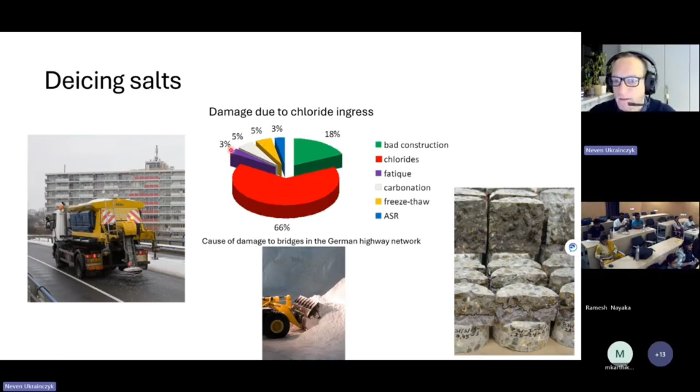So the combination of carbonation and chlorides - my master's thesis was actually to do machine learning on all this data, to do neural networks on all this data collected during the maintenance works.

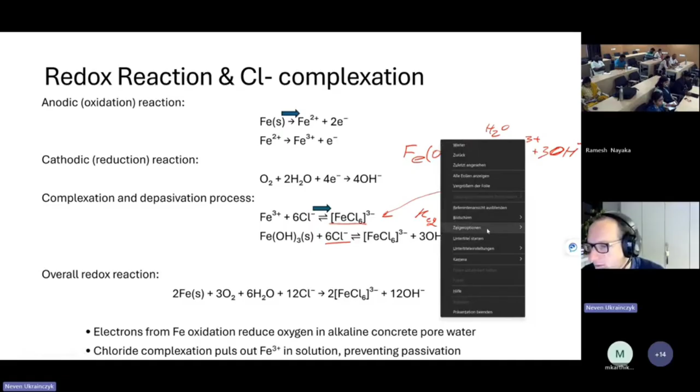And because we have this now, the iron is pulled out by this reaction, because the iron is taken to form the iron complex. We have the equilibrium constant here for the complexation, so this takes some iron away. In equilibrium you have less iron here, and because you have less iron here, that means you have to dissolve more iron hydroxide, increasing the OH. So you are making the iron hydroxide more soluble. Either by lowering the pH or increasing the chloride content - that means lowering the iron content - you are increasing the solubility of iron hydroxide.

This is the same principle I'm trying to teach you, and you can see it's very important. This is what explains why the chlorides accelerate and depassivate the corrosion of steel - basically because they are making the iron hydroxide more soluble.

But of course, in corrosion we also have the cathodic reduction reaction. So the diffusion of oxygen is also important, because this governs the rate of the total corrosion rate. The overall redox, reduction and oxidation reaction needs chloride and also oxygen. So chlorides are important for diffusion because they explain the depassivation, the initiation phase, but when you enter the propagation phase, both the chloride diffusion and oxygen are important in determining the rate of the corrosion reaction.

So here is the picture of the reinforcement - the rebar reinforcement bars, steel bars. Here we can see the surface concentration, and how the chlorides diffuse inside the concrete, reaching some critical threshold.

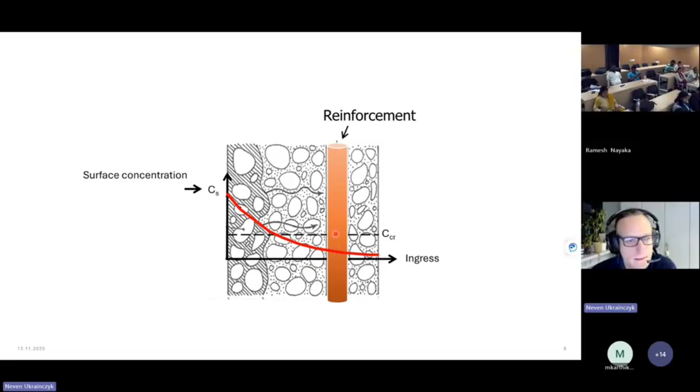This is the critical threshold when the steel starts to become depassivated, and now you know that this actually also depends on the pH. So this critical threshold is a function of pH, and you know why - of pH and of chlorides. So it's not only - in standards we have the critical threshold for chlorides, but this is actually also pH dependent, and you know why now.

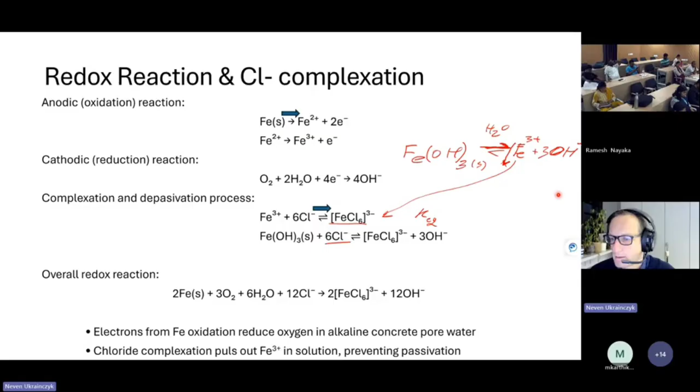So this is typically 0.4%, per mass of cement.

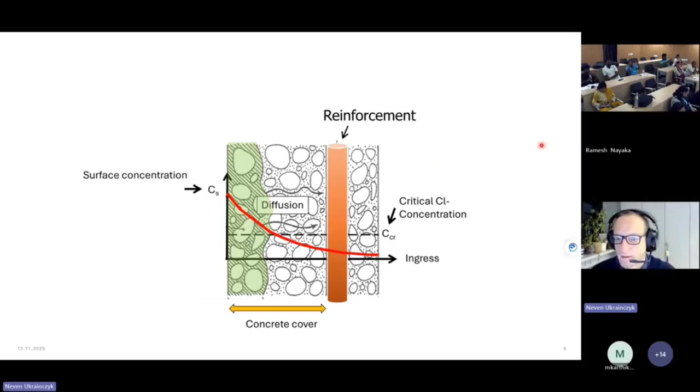This is the concrete cover depth, so the thicker the concrete cover depth, the better for durability. This is the most important design parameter, and you should make this cover depth as thick as possible.

If you put here, this is the RCM test, when you spray it after diffusion, when you spray it with silver nitrate spray, you can see the silver chloride in this silver color. So you can exactly see the penetration depth, how the chlorides come in, and you can see here some ITZ effect and aggregate effects.

And this becomes very important, for example, if you have low water cement ratios and also slag, because then the microstructure is very dense, and then the ITZ, the porous zones, start to become the critical path that the chlorides follow.

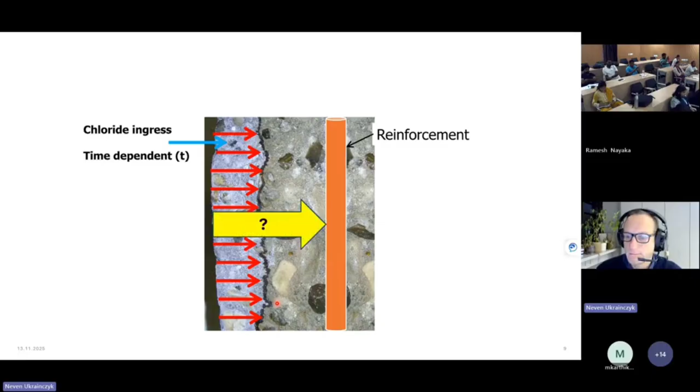So how to engineering model, how to predict this diffusion? It's the FIB Model Code 2020. There is also an update bulletin. I was also involved here, but more for the acid attacks. You can find this bulletin here, and yeah, it's a very nice guideline. It's published, I think, last year.

This is from the original model code. So basically it's just a diffusion of modified second Fick's law. We have here the apparent diffusion coefficient.

Why is it apparent? Because we have the effect of it includes all the parameters, because it's a very simplified model by diffusion. We don't have only diffusion, we also have a reaction, and then also convection, or many things happening. But if you simplify it only as a diffusion, then this parameter is apparent. The most important part is the reaction, the binding of chlorides, and this is why this is apparent.

We have the error function here, and this apparent diffusion coefficient is also time dependent, because the concrete is hardening. You have the pozzolans which are slowly reacting, so they are improving the microstructure. So this is also time dependent, not only because of binding, it's mostly because of the continuous hardening of the concrete, but I would also argue it's because of other effects, like binding effects and pH effects on binding.

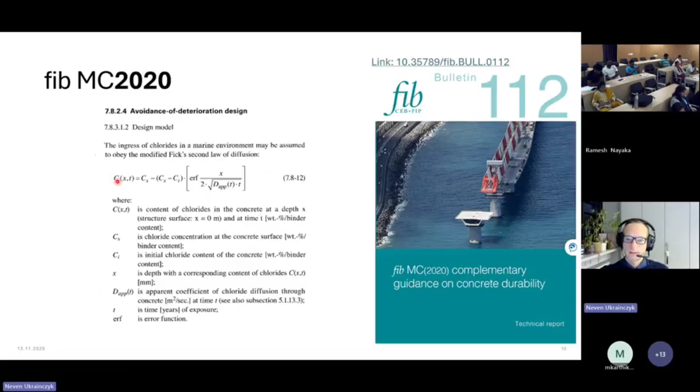So basically, we consider here the total chlorides, meaning the free and the bound chloride. So the total is free plus bound. If this is a pore, we have the chlorides that are bound to the solid, and we have the free in the bulk pore solution. So this would be the bound, and these are the free chlorides. And if you do the mass balance, yeah, the total is kilogram chlorides per cubic meter of concrete, and if we have the free chlorides, also kilogram chloride per cubic meter of pore solution.

We can derive, this is the second Fick's law. It's basically saying that the flux that comes in is equal to the flux that goes out. That's why we have this, this is the flux, and this is the change of the flux in this direction. So what comes in must go out, because there is no reaction.

If you would have a reaction, you just have to add it. But if it's in steady state, yeah, this is the steady state, what comes in must go out. So if there is no accumulation, this is zero. Then you have this Laplace equation, which is basically the second derivative of the concentration.

I will explain this later. I'm just explaining the diffusion equation, how you derive it. So basically you have the concentration gradient. If you take the second derivative, which basically means the change of flux.

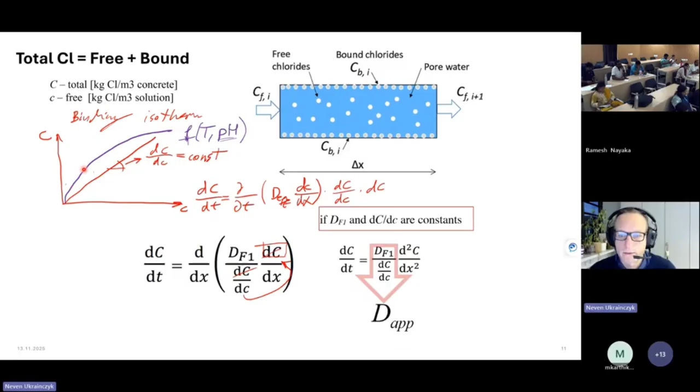The time dependent diffusion coefficient in the Eurocode or the FIB model code 2020 is modeled using the migration coefficient from the RCM, rapid chloride migration test. This rapid chloride migration is not really the real diffusion coefficient, it correlates but it's not the same, but this is the approach because you need rapid measurements and rapid predictions.

We cannot wait. Of course you can take the chloride profile after it's in service, but you can only do that when performing maintenance. If you design new concrete for bridges, you have to predict in advance, so you need rapid measurements. Measurements are typically made after 28 days, but nowadays they're changing this to 56 days or even longer, because of more pozzolans inside which react slowly, so we need a better reference with longer hydration time.

Here is the aging factor, typically 0.3, and this shows how the apparent diffusion coefficient changes with time. This makes the diffusion coefficient time dependent, and you can see this influence of time. A typical value is 10 to the power of minus 12 meter squared per second.

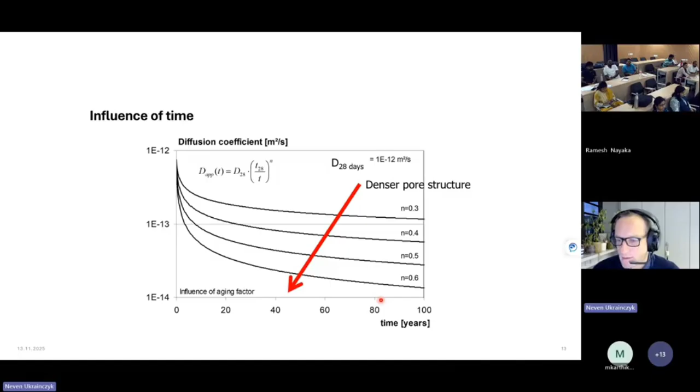That's because the pore structure gets more dense due to late pozzolanic reactions. So there are aging factors influenced by the type of cement. CEM1 would have an n of 0.26, very fast reacting, with no big change between 28 days and the final value. But if you use fly ash, you have a much bigger aging factor coefficient, around 0.7.

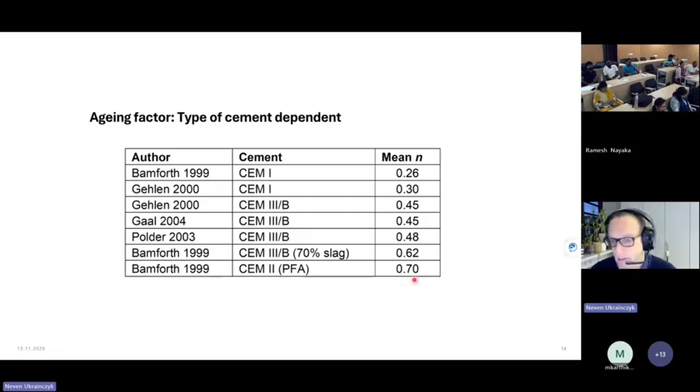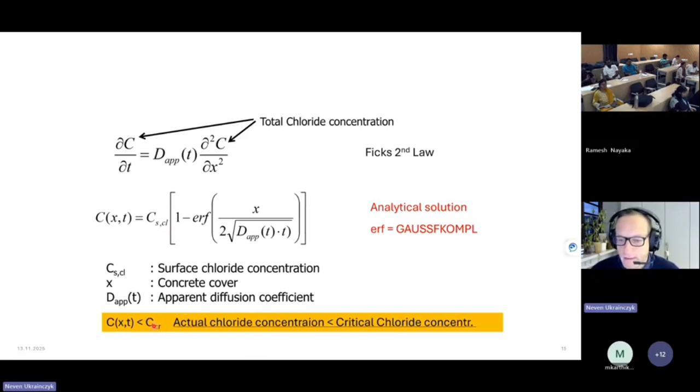Now this is Fick's second law. You can implement this in Python, Excel, wherever you want. We want to predict when the cover depth at the steel level reaches the critical chloride content. When it reaches that critical chloride content, we need to do maintenance: remove the old contaminated cover depth with chlorides and apply new repair mortar.

Here's an example we will solve later. Let's say the surface concentration, the boundary condition, is 3% of the cement mass. This can also change with time, and there are models that account for that, but in this simple model let's fix it at 3%.

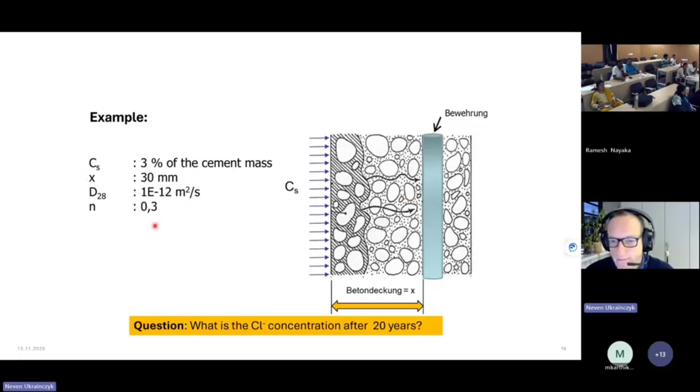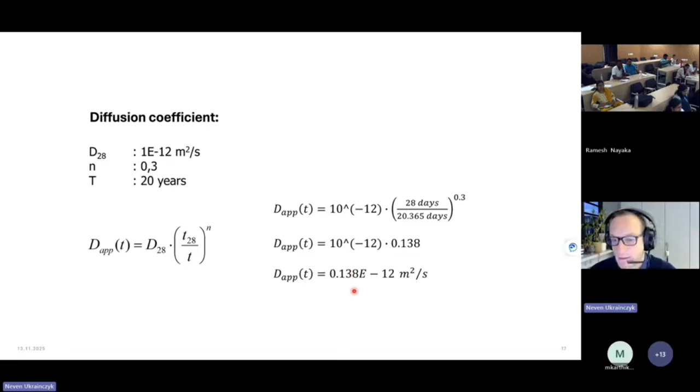We have this diffusion coefficient and the cover depth is 3 centimeters, with an n coefficient of 0.3. Plugging in these values, you can see how the apparent diffusion coefficient is reducing. After 20 years, we go from 10 to the power of minus 12 to 0.13 times 10 to the power of minus 12, almost an order of magnitude lower, which is very important for prediction.

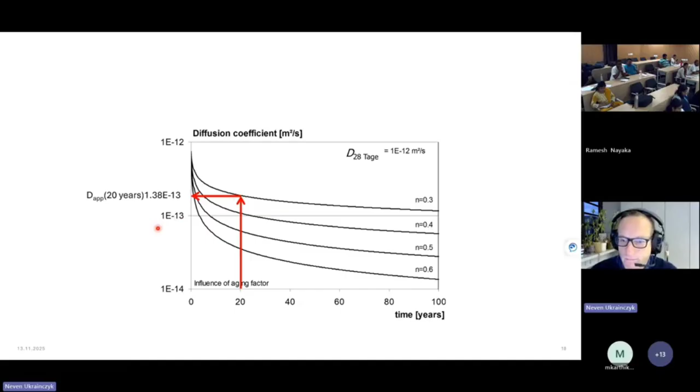So after 20 years, we have an order of magnitude reduction in the diffusion coefficient. This is the critical parameter that basically determines the service life.

If we plug in the values, we get that the predicted chloride content at the depth of the steel bar after 20 years is 0.16%, while the critical threshold amount is 0.4% per mass of cement. Since 0.16 is less than 0.4, we are good — this structure will last at least 20 years.

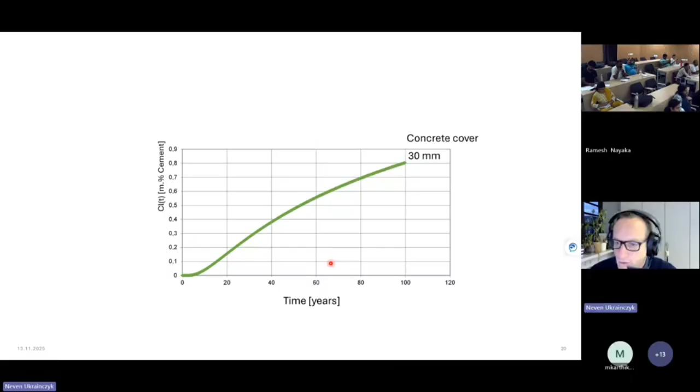Now we can predict at 30 millimeters how this develops with time. At 20 years we had 0.16, but now we can plot at what time we reach the critical chloride concentration of 0.4 mass percent of cement, and we see that this structure will actually last for 40 years. After 40 years, but maybe even before, we should do some maintenance and replace the concrete cover.

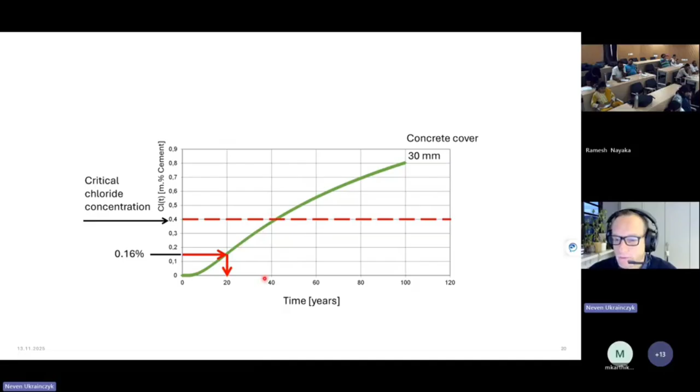But it's a statistical problem. Yeah, this is a deterministic model, but the problem is statistical because we have the variation of the concrete cover depth. We also have uncertainties in parameters, and that's actually in the model code. You already have the stochastic, probabilistic approach, so you can have uncertainty about at which year you should make the maintenance, with how much percentage of uncertainty or certainty.

So you can also have different cover depths. This is for design. Of course, if you increase the cover depth, you drastically increase the service life of concrete. Or you should actually make the concrete better, that binds more chlorides and is denser or less porous, more better concrete.

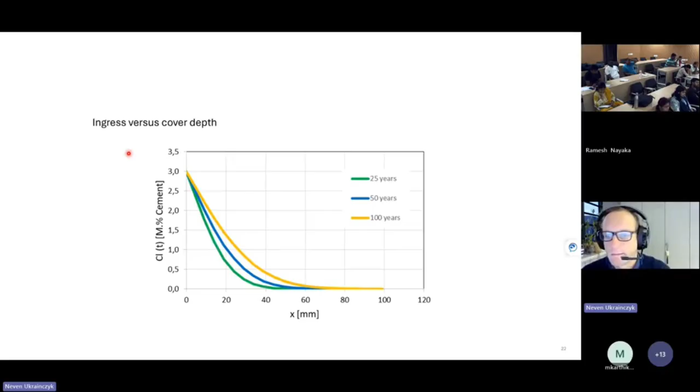So here you can now play with the model. There was the RILEM TC, the old technical committee on chloride ingress modeling. It was to benchmark chloride ingress. Professor Gehlen was chairing this. I was helping here, and I also drafted and wrote the chapter 3 on marine submerged conditions together with the French guy, Anthony Soive. And we basically benchmarked a lot of models.

Here are the models, different models. We use the FIB as a reference. Those are all the big guys in this field using models, and then we were predicting. I also had here one model, the reaction diffusion model, where I explicitly modeled the chloride ingress by the nonlinear isotherm, Freundlich and Langmuir. So there were analytical models and numerical models, and some quite advanced reactive transport models, like STADIUM for example, and more advanced analytical models.

And there is one case study, very well defined, from Norway I think, or Sweden, I'm not sure, I think it was Norway. They did a very well documented case study, and we used that case study to benchmark the models.

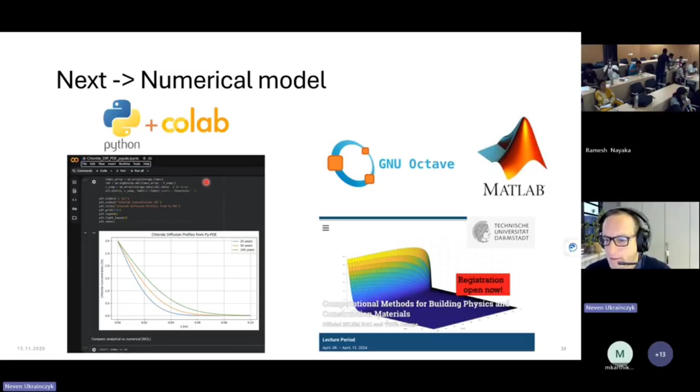So you will see some examples later in the Python. I think this part I will explain later. Yeah, this is a reaction diffusion model.

I implemented this in MATLAB to solve this partial differential equation with reaction and diffusion. This was an example of one model. There were many more advanced models with reactive transport, even using moisture, convection - quite advanced models were also inside.

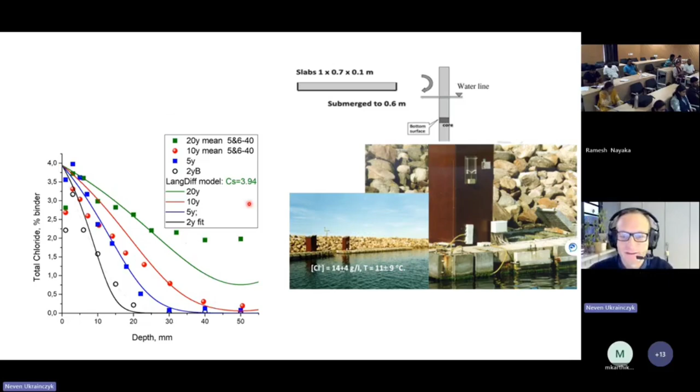So these are the measurement points, and those are the predictions by the model. The dispersion of the model predictions was huge - some over-predicting, some under-predicting. There was a huge dispersion between the predictions.

I didn't show it here, but you can see it in this book. I think I even have it on ResearchGate, so if you want I can share it with you.

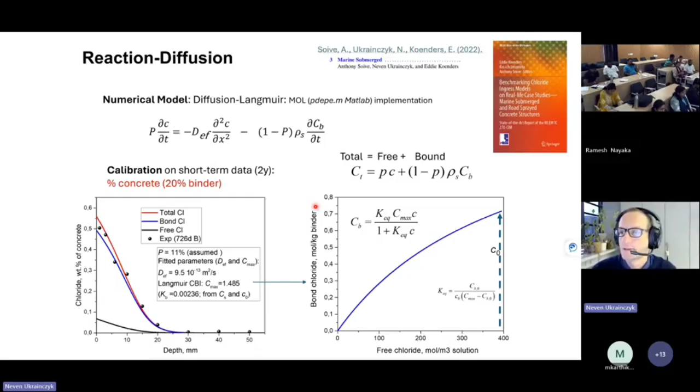So that was the old TC. Now we have the new TC meeting. This is chaired by Pranoy - probably you know Pranoy, at University of Miami, an Indian guy. I don't know exactly where he's from, which part of India - Prannoy Suraneni. And he's chairing this with William Wilson.

And we just published a paper in Materials and Structures. It's open access, so you can see it. It basically reviews all the methods you can use to predict the diffusion coefficient, and it's also focused on blended cements, so that's very timely and relevant.

It's focused on paste - how to downscale, how to do fast measurements on paste and mortars, so that you don't have to do it on concrete, but you can also compare with concrete, and maybe speed up the measurements through downscaling, because then you can test the blended pozzolans and how they affect the diffusion coefficient. So we focused on blended cement pastes.

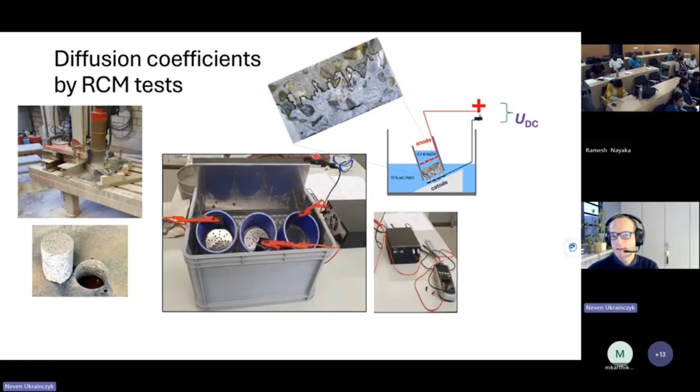That's how the RCM, rapid chloride migration test, looks like in our lab. We are now running a round robin test in this technical committee with 4 different mixtures: ordinary Portland cement, fly ash blended with slag, and LC3 with limestone and clay - 30%, 33% clay, the LC3 mixture.

On those mortars and pastes, we had 1 year of hydration, then exposure for 28 days to a 0.5 molar sodium chloride solution. It's coated in epoxy so that we have one-dimensional diffusion.

Then you can do the grinding for the Volhard titration method, or, as we did, take a cross section and use the microscope, like micro XRF or EDS. We have EDS here in our lab, so we are developing a methodology for using EDS microscopy to get the chloride profiles.

So this is the round robin test we are currently running - you can join if you want. We are comparing different methods with different blended mixtures, measuring both paste and mortar. That's currently ongoing in this technical committee - it's working group 4, and I'm chairing this group.

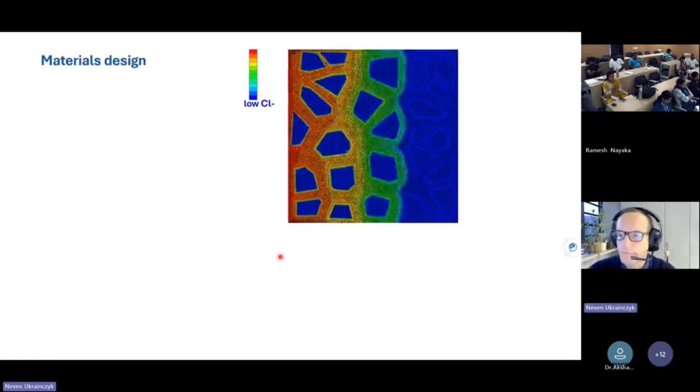In mix design, going into concrete, you can see how ITZs also affect things - they are the more porous regions which affect the penetration.

And there are also coatings you can use, like styrene-butadiene rubber coatings, typically used in the US at least 10 years ago. Nowadays, for environmental reasons, maybe they should be replaced. There are other coatings I reviewed in this paper.

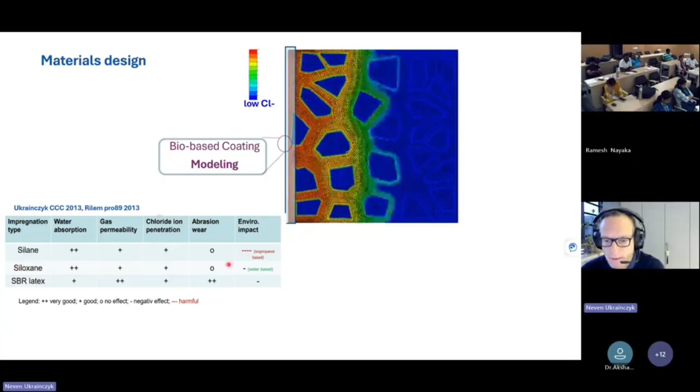Silanes, siloxanes, SBRs - that's experimental work done in the lab, showing pros and cons of each, and environmental impact too. You should use water-based siloxanes, and then see how they lower water absorption, gas permeability, chloride penetration, and also abrasion wear.

This is the multiscale view. If you go into the cement paste, you have the diffusion of chlorides in the cement paste, and the ITZ is also very important.

Here I come back to this UHPC which we are making for the floating farms, where we are using slag blended cements in UHPC, ultra high performance concrete, with steel fibers.

A few weeks ago we were in Spain, at the factory which is producing these UHPCs. We are making the first design of this kind of structure.

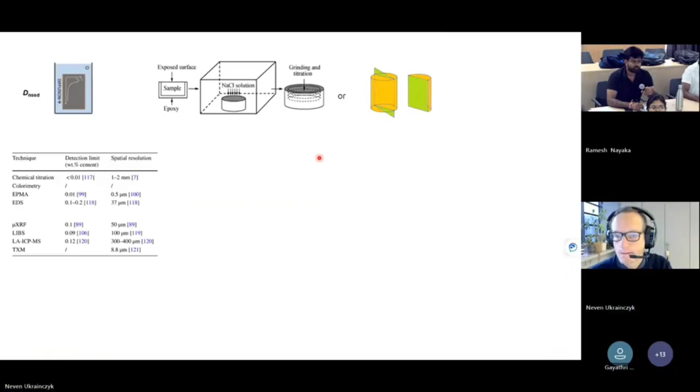For RCM, I would recommend you better do the full RCM test, rapid chloride migration test, the NT Build norm. I think I have it here. Yeah, this is the worst method you can do, the rapid penetration - I know it's the fastest, but it's also the most uncertain. I removed the non-steady... I didn't put but this is the NT Build, I didn't put the norms, I forgot the number.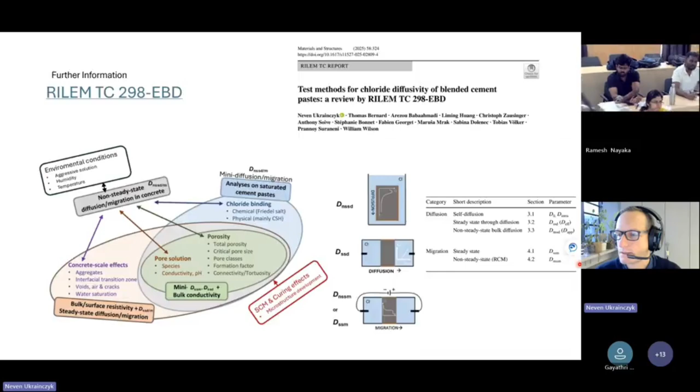At least for RCM, I would recommend you do the RCM test. You can also check this in the paper we reviewed - we also discuss... where was it... this, we also had some discussion on the methods.

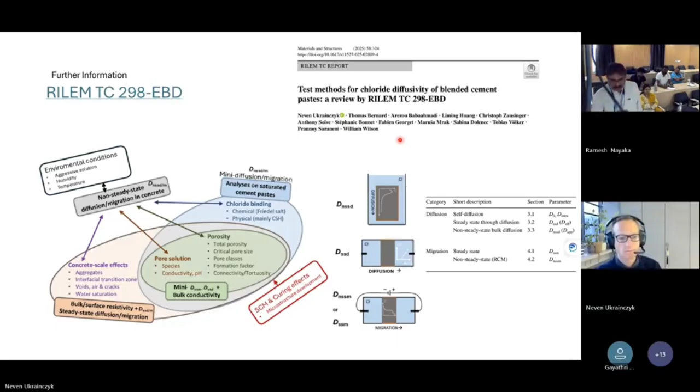But for geopolymers, actually, because they are interesting for acid resistance, I will talk about that. You will see some geopolymers here for the acid attack.

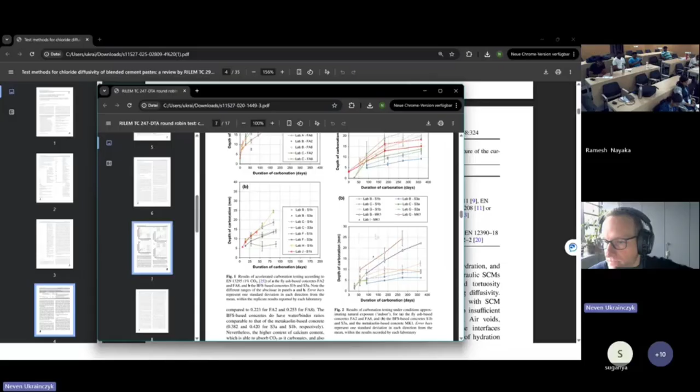RILEM TC 247-DTA, it's on carbonation and chloride penetration testing of alkali activated concrete. I shared the link with you in the chat. So very nice, you can see here the effects of how to measure it on alkali activated materials.

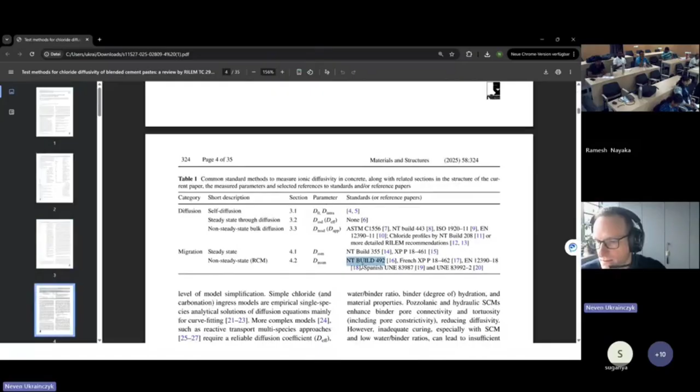And here I also - they are all open access papers. This is the one, maybe I can also share this link. And here you can see the methods, so this is the NT Build, it's also freely available, that's the Norway standard, it's also an EU standard. So this is what I would suggest you do, the RCM test, rapid chloride migration.

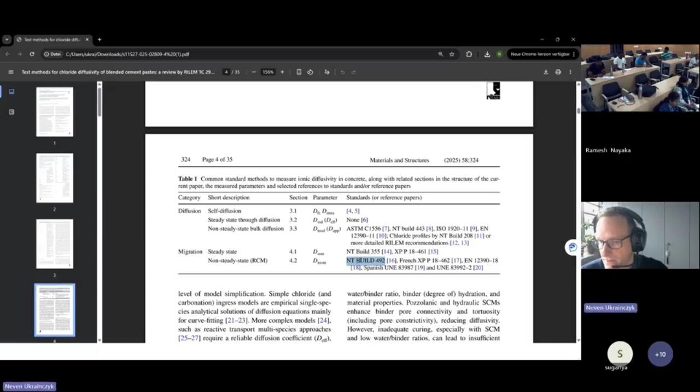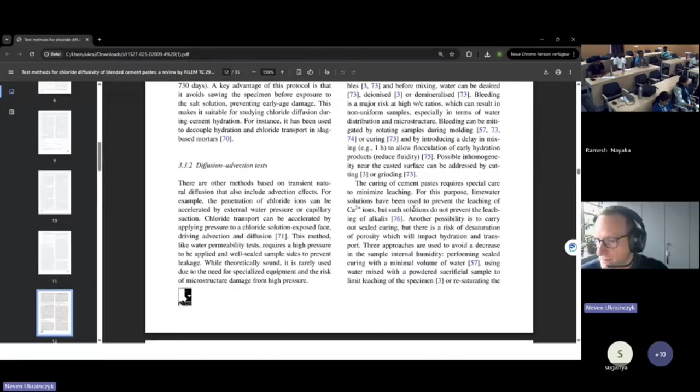And actually here you can see what we wrote. We didn't even include the RCPT test because there are some other tests, also interesting tests with penetration, but where was this text on migration? Yeah, migration tests, and then, I think you are referring to this one - it's the French, or the Canadians use this test also, I know a lot.

The coulomb test - you are basically measuring just the charge passed, as an index of chloride resistance, but cannot directly determine the diffusion coefficient due to involvement of all ions. However, using almost the same setup, a non-steady-state diffusion coefficient can be theoretically calculated, as outlined in NT Build. I think it's not so difficult to use the same, almost similar setup and switch to NT Build. I would recommend you use the NT Build method.

Of course, there are differences, but I think the setup is similar. I think it will be easy for you to follow and to build on the same setup. So let's continue with acid.

And now we go also to geopolymers. If you are interested in geopolymers, we do a lot of research, 11 years already researching geopolymers with companies, trying to bring this to market, but also a lot of fundamental research. Especially I'm focused on acid resistance.

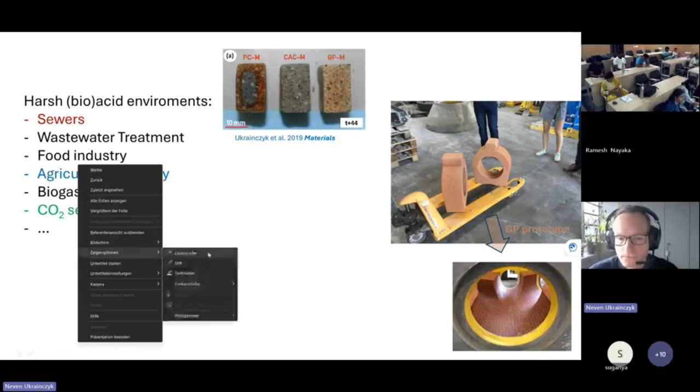But there is also wastewater treatment plants, food industry with a lot of organic acids, agricultural industry, biogas nowadays because of the energy crisis. CO2 sequestration also - that's the paper I showed you where they want pumping of CO2 into abandoned oil wells, but I think this is not so relevant nowadays. It was interesting maybe 10 years ago.

So we have different exposure classes. XA1 - I don't know if you also follow this, I think this is European, similar in US, and probably you have similar things in India. Exposure classes mean the concrete should be designed according to the exposure class. So basically, when you define the concentration of the aggressive species or the pH in the table, then you define the class, and then you know the minimum water cement ratio and the strength and all these durability parameters.

But what I told you in sewers, basically, you need surface protection. This is what I wanted to say here. Basically, in XA2, XA3, and there is a new class, XA4, all the classes require surface protection. So only XA1, only if you have very low chemical attack, you don't have to use it. But in the EU, I think in US the same, you always have to use surface protections.

But the coatings are also not so sustainable, let's say. The company where we were doing this demo with geopolymer pipes - actually in this factory, they had linings, like polyethylene linings in the sewers, but they also had many problems with these linings.

So this is how the UHPC would look like after a year or a year and a half in situ in sewer systems. And you can see the geopolymer may change color, but actually was performing really well.

We also did some research on using copper, since copper has antibacterial properties, but we actually abandoned this idea, although nowadays we see many papers doing this again. But you also have the leaching of copper, so the question is, is it really sustainable?

We also tried with zinc oxide, but I think only geopolymers work well if you design them well, with alkali activated materials. We did pure geopolymers without calcium, but if you add some slag, that would also improve the durability. Because the more calcium you have, the more soluble it becomes, but it's also less porosity.

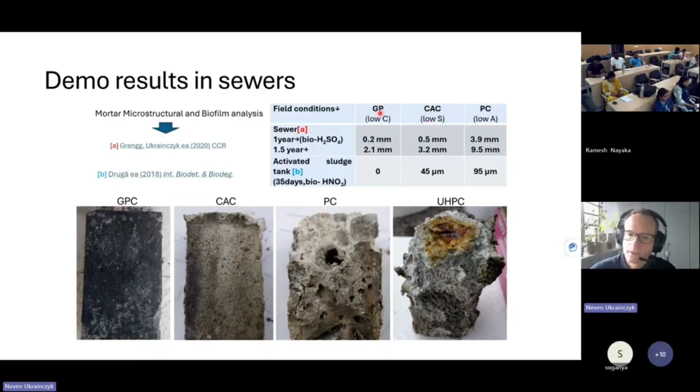which are 3 times more expensive than Portland cements. Yeah, it depends also on the mixture. Geopolymer is more expensive, but it's more durable.

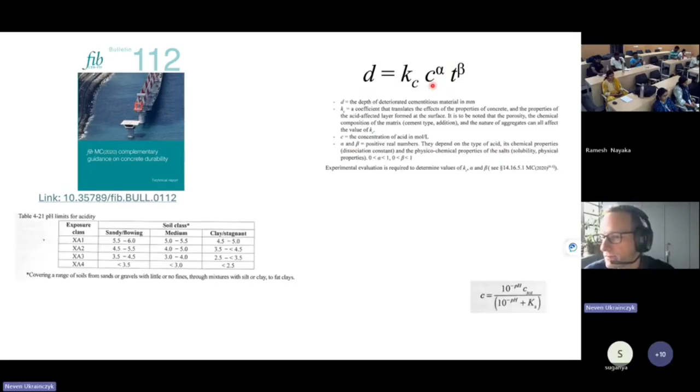the alpha. And alpha actually depends on the type of acid, because you have different types of acid. So if you have a soluble salt acid like nitric acid, then beta is 0.5. But if you have a protective salt acid like sulfuric acid, because it makes

a protective layer, but it also closes the porosity because of the precipitation of gypsum, but it also makes cracks. So then you can change this beta factor. And you can have a strongly dissociating acid, which basically means you have a very high equilibrium constant.

Then you can easily calculate the pH. But if you have a buffering acid like acetic acid, this is the way you can calculate the concentration from the pH, or the pH from the concentration, because this is weak. Weak means that it's weakly dissociated.

It's not weak in that it's not... it's actually even more, it has a buffer effect. Weak means that it's a weak constant, meaning it's weakly dissociated, so the pH is higher, but you have a high amount of buffer that can then provide more protons, more H+. So it's not weak - it can even destroy more concrete than the strong one for the same pH, because of this buffering effect. Weak means only that it's a weakly dissociated acid, like sulfuric acid being strongly dissociated, and acetic acid, so vinegar, being an example of a weak one.

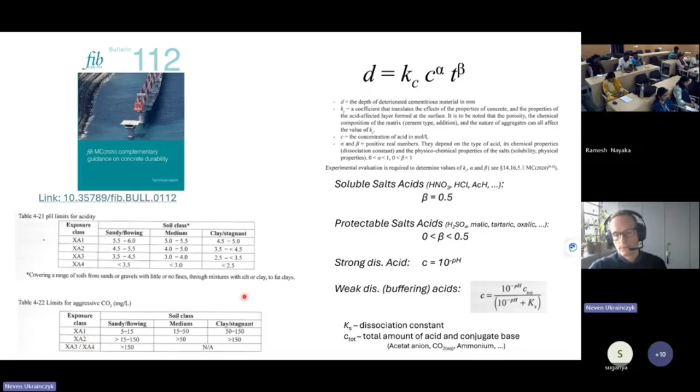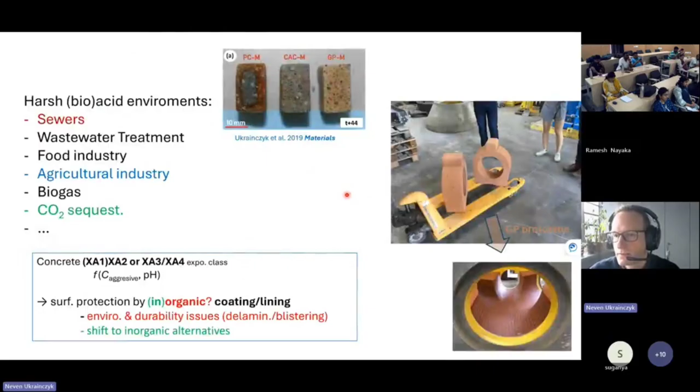It's one of those samples here, but for aluminate cement - actually acetic acid strongly dissolves aluminate cement, which should be acid resistant, but because of these complexation reactions, it dissolves a lot of calcium. And now you know the mechanism.

Again explained by the solubility constants, you are increasing the dissolution of hydration products. Also, by acetic acid, you are complexing the calcium - making a calcium acetate complex, which is again taking calcium from the equilibrium ion activity product, so you need to dissolve even more. This is why calcium aluminate, although it's a very acid resistant material, does not resist acetic acid so much.

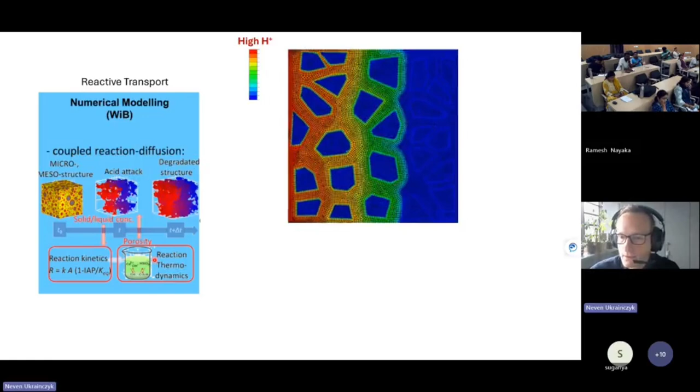So we are also working on reactive transport models to really understand the thermodynamic dissolution - what we saw here, the chemistry behind it - also solubility of geopolymers. This is what I am developing. This is not yet available in the literature, especially not the acid resistant thermodynamic description of geopolymer. And then to link this in a reactive transport model for acid attack, we have fundamental research projects on this.

You can see on cementitious materials thermodynamic modeling, when you are adding acid, you can do this with GEMS already now - I will show you examples. So you can predict how the portlandite here dissolves for acetic acid, and here for sulfuric acid. When you are adding more and more acid, the portlandite dissolves, then the CSH is dissolving, and you are precipitating silica gel, and the pH goes down.

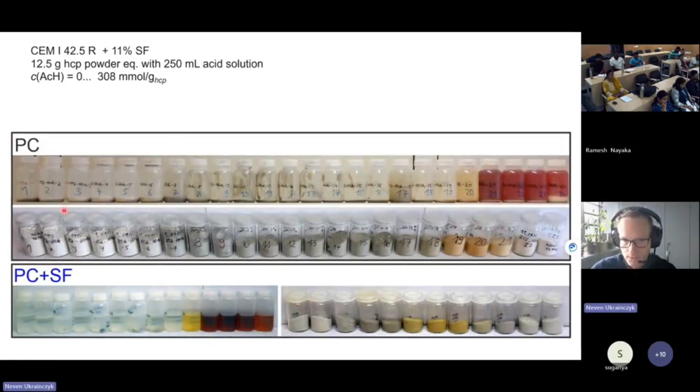The difference is that acetic acid doesn't precipitate any protective salts, but with sulfuric acid we have gypsum precipitation - but this is a high volume of gypsum, so there is some critical volume that then makes cracks because it's expanding, wants to crystallize, and then it's expansive and you get cracks. So it is protective, yes, but it also makes your layer crack, which then again allows new acid to come in. So we did a lot of tests on thermodynamics, many mixtures with different acid concentrations with Portland cement and silica fume.

Also for sulfuric acid, this is acetic acid. With sulfuric acid there was this protective layer, so we could not really get the equilibriums - that's the challenge with sulfuric acid. And you can see the model.

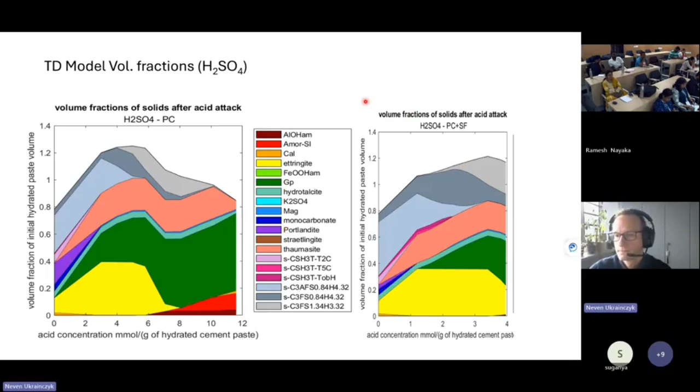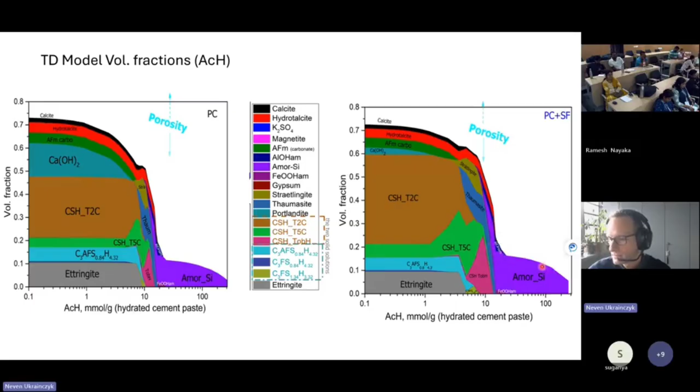This is the volume fractions with acetic acid, with Portlandite, Portland cement and silica fume. Again, less Portlandite. And you can see which phases are forming - you have thaumasite, straetlingite, later it's dissolving. We have alumina gel here precipitating, and amorphous silica gel, also iron gel.

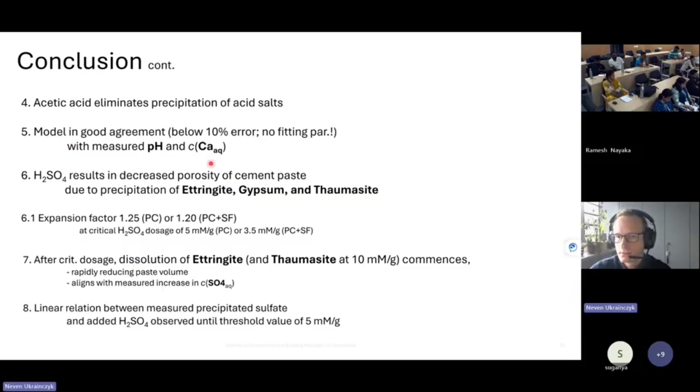Some conclusions - you can read this. There were some interesting conclusions. And now I will go to geopolymers.

So you have aluminosilicates. Here you don't have calcium, basically, and this is what makes it acid resistant. So you have these aluminate tetrahedra and silicate tetrahedra, which you have with aluminosilicates like, for example, clay minerals - they are dissolving. You have potassium activators, hydroxide activators, and silicates, which then polymerize.

So those are the tetrahedra, aluminates and silicates. Silicate is neutral - this is the silicate tetrahedron, and aluminate has one negative charge. And basically you are just linking those tetrahedra. It's called polycondensation, because you are basically releasing water. Those are the oxo bridges in between.

You are releasing water, so it's opposite to cement hydration where you bind water - here actually you are releasing water in a polycondensation reaction, and you are making this three-dimensional polymer. That's why it's called geopolymer, but it's made from silicate, not from organic carbon, but inorganic, from an aluminosilicate polymer network.

If you would polymerize this further and crystallize, you would get zeolites. So they are basically amorphous analogs of zeolites. And you can see this reaction written also chemically - you can see these oxo bridges here.

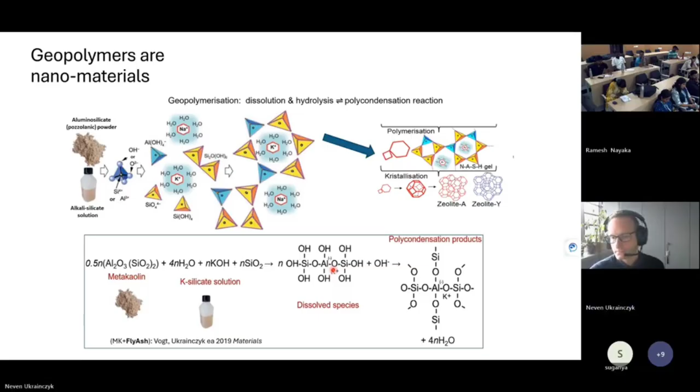And this is important because with acid attack we have leaching of these alkalis, and this is why I'm explaining this - because it's also important for the pH for the reinforcement. If you want to use it, then actually this pH very fast it goes down, by leaching or by acid.

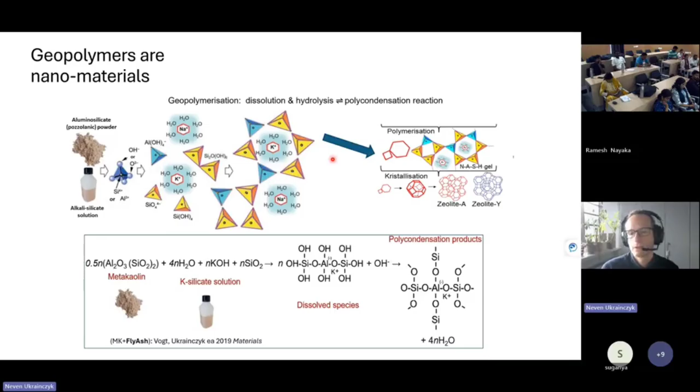So these are the raw materials and characterizations that we use. Basically it's a mixed clay and a very pure clay. This doesn't work so good, the pure clay. This is the Metamax commercial, but this clay is very successful - it has also high iron content, and it has illite inside.

So we compare this with Portland cement, calcium aluminate cements - I will not go into all the details. Of course we are using potassium silicates, not sodium, because potassium is better, although it's a bit more expensive, but it's better because it's better rheology, but also less leaching.

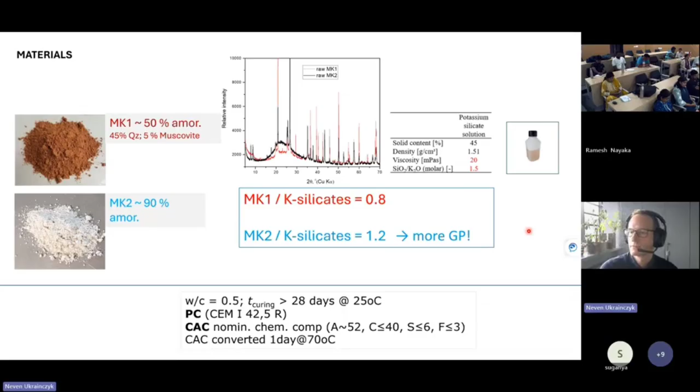Here you can see the viscosity, and the molar ratio of silicate to potassium is 1.5, but now we are using 1.7, because with 1.7 you can transport this. It's not hazardous, it's less alkaline, so you don't need special permission to transport this kind of silicate. That means less alkaline, more silicates. It also works very good, and it's more sustainable.

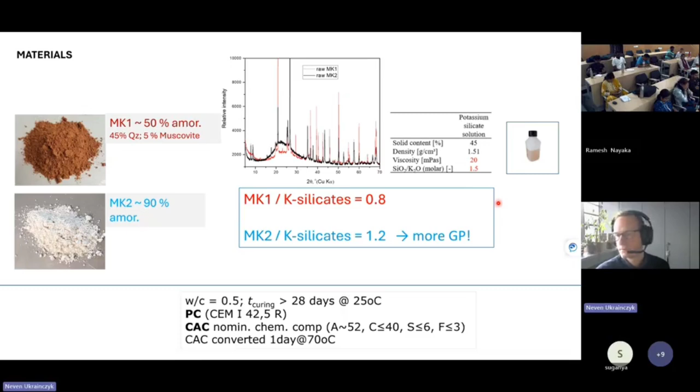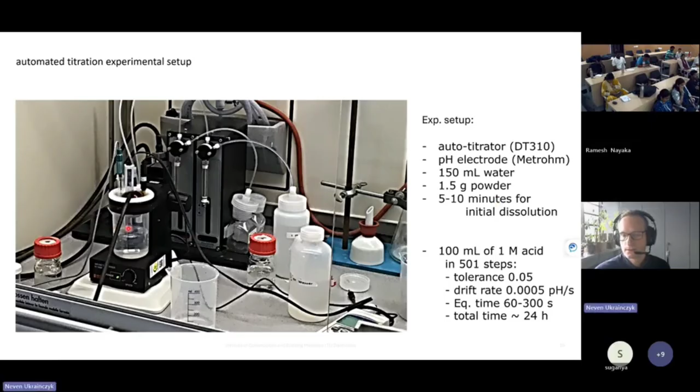Here I wanted to show you can do the pH titration experiments. Basically you are dosing acid, and you can see the neutralization capacity of the binder. This is very important, because for Portland cement it has a very high buffering. So you are adding HCl and reducing the pH. It's in the powder, so this is almost equilibrium powders. You can measure the neutralization capacity of the binder.

This is because of the dissolution of portlandite and CSH, and then you have alumina gel, probably in dissolution, and there is no buffering at low pH. Now for alumina cement, it actually has lower buffering capacity than Portland cement, but it has better buffering at lower pH. This is why alumina cement performs good in sewer systems, because you have this alumina gel formation, which maybe also works as antibacterial because of aluminates, and you have closing of the pores at pH of 4. But if you go below 4, then you are dissolving this alumina gel, and then again you have very high dissolution.

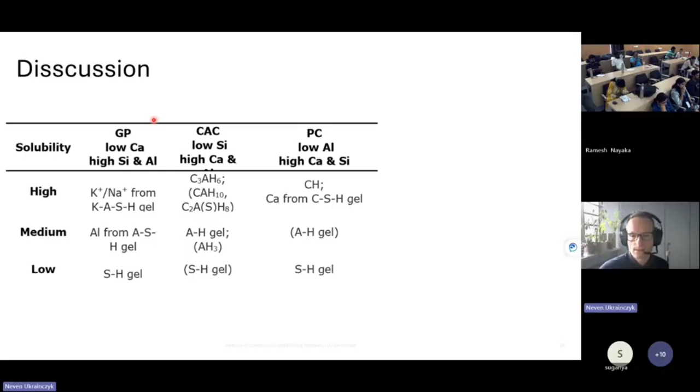Here I also compare it with different acids that you have here. Formation with Portland cement, you would have crystallization of ettringite at the beginning and later gypsum crystals. Alumina cement also gypsum crystals inside. This is what we also saw in this publication in CCR when we compare those degradations after sewer, in situ sewer exposure. But here you would have also gypsum, but some also alum salts, those are the potassium alumino sulfates. Potassium, I think they are called alums in geochemistry.

And with acetic acid, you don't have any soluble salt precipitating, but you have the complexation, which makes all the minerals even more soluble. So this is the mechanism for geopolymer acid attack, which we have published in many papers. Basically you can see that this proton is attacking first, it's an ion exchange of proton with potassium or natrium. So we have here the protons, so then those are more leachable. And then later this proton also attacks the aluminate, so we have the dealumination reactions.

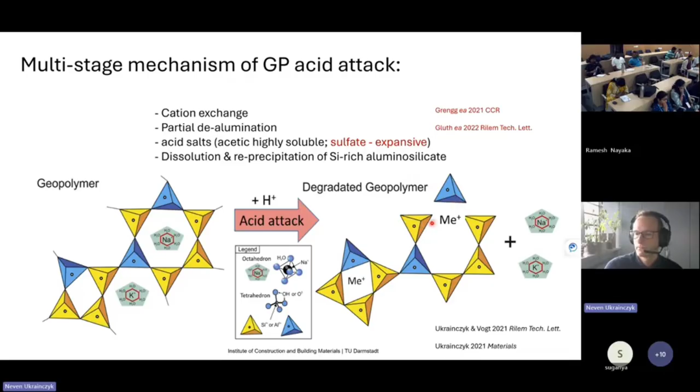So there are no standards for this. There is a water leaching test for concrete, also a standard for acid attack of concrete, but for geopolymers they should be adapted, and this is my proposal in these papers.

We also did this for acetic acid. There was a titration because for sulfuric acid, since it's a strong dissociating acid, you need to dose it. Acetic acid you don't need to dose because it's always buffering.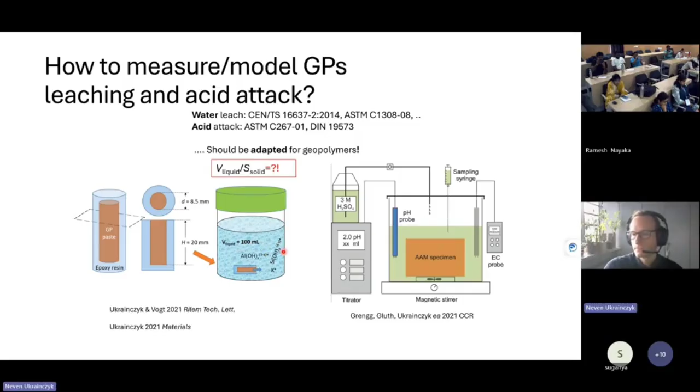And here are some results. You can see how the cumulative fraction of leached potassium changes with time, and you could fit it to the simple diffusion equation. The stronger the acid, the stronger the leaching of potassium. So this is the amount of leached potassium in the solution with time, shown here for water, for very low concentration of acid, for higher concentration of acetic acid, and for very high concentration of acetic acid.

And this one was on the red clay geopolymer. We did also see that this almost 5 times increased the apparent diffusion coefficient. What I told you, we can model it with a simple diffusion equation.

And with the white clay, those diffusion coefficients were actually two times or even 58 times lower. So actually these performed better. And this again we can explain by the fact that here we have a bigger amount of geopolymer than here.

But the problem with this is that this mixture cracks. It has very high dry shrinkage sensitivity, and this one doesn't crack.

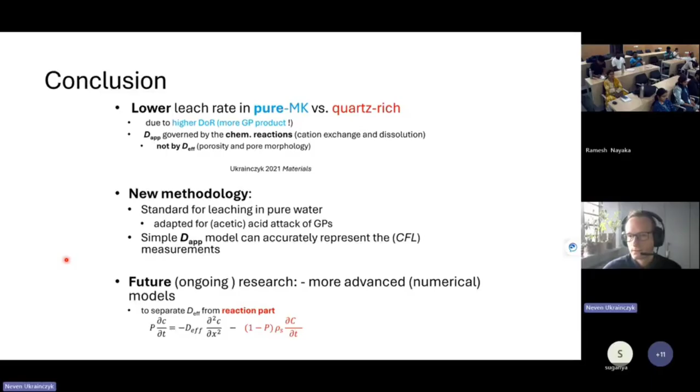So again, some conclusions. Here now I'm doing the modeling using a supercomputer for these acid models. And here I would like to finish by linking everything together.

So this is, you need the microstructure, which was the first day. You need Pozzolanic reactions to adapt the models for the current modern binders, which is the clay or even geopolymers. You need to understand the microstructure formation, and then it's important also for the durability.

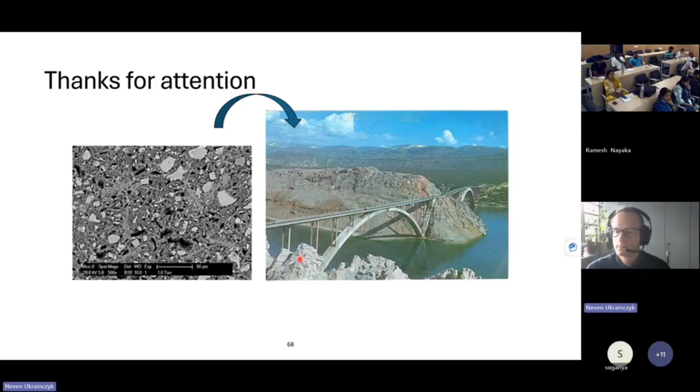And again, you have this multi-scale approach where you should go from microstructure, from the chemistry, from raw materials to the structure, and be able to predict the performance at the structural level.

So with this, we ended the theoretical part. And now...

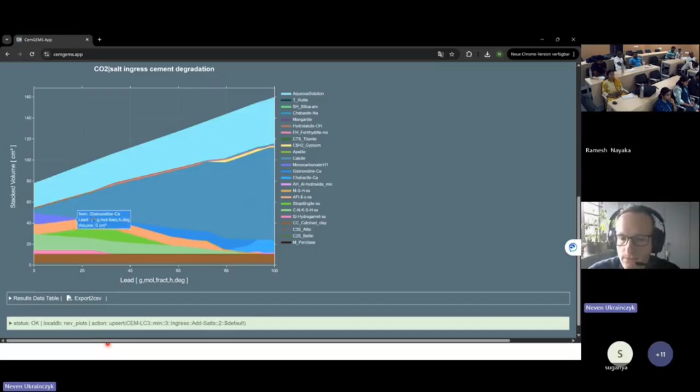I can show you later, after the lunch break, how you can model the diffusion in Python, and I will also show you in CemGEMS how you can easily, with the process modeling, model the phase assemblage of the chemical attack, CO2 or acid. We can see how the phases are dissolving, and you can model this also in the CemGEMS app.

So simply in this process, you can simulate all these minerals, also aluminate cement, LC3 system, and then you can add here leaching or ingress. You can define the salts and just simulate, and you can get a nice thermodynamic prediction of the leaching and also the chemical attacks.

So we have two things for the demonstration in Python: how you can model the diffusion, and also how you can model the chemical attack in a thermodynamic modeling.

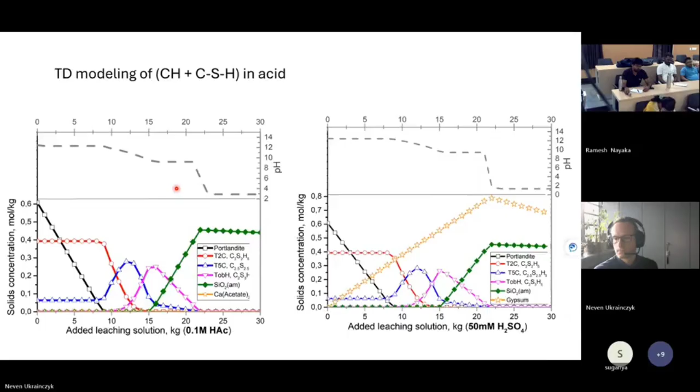It's similar to what we are doing for chloride ingress - this is the round robin test. But now here you can see it on the acid attack. I think in chlorides you have a nicer figure - yeah, this one.

It's quite tedious because we wanted to automatize it with image analysis tools, but the problem is the EDAX software fitting the composition - it can only do it in the software, so we cannot really automatize it easily. We can get the composition of each pixel, but the pixel is fitting the composition to the EDX profile.

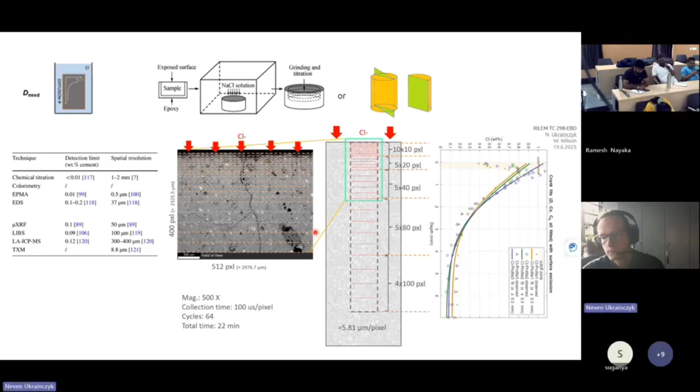But one pixel is not enough because it's very low resolution. You need a statistical average, a lot of pixels, to get a good EDS signal that you can fit to get good concentration composition. Maybe if you would use EPMA - this is what we did here, but this was really high resolution, a very advanced technique. They did it in Graz.

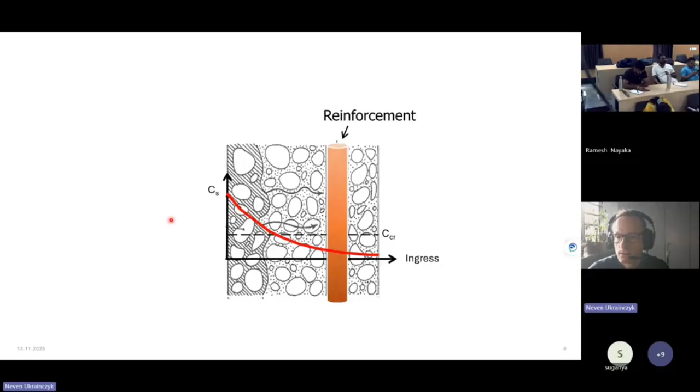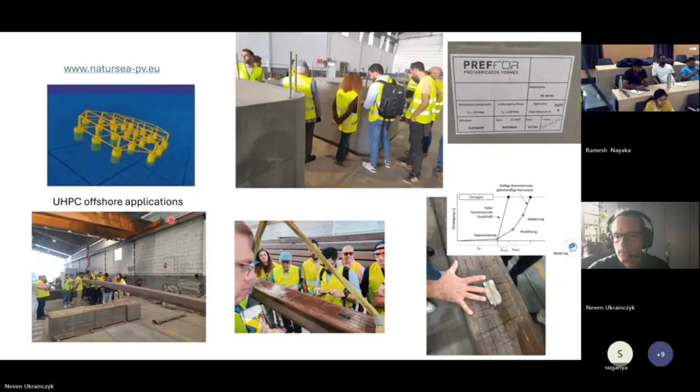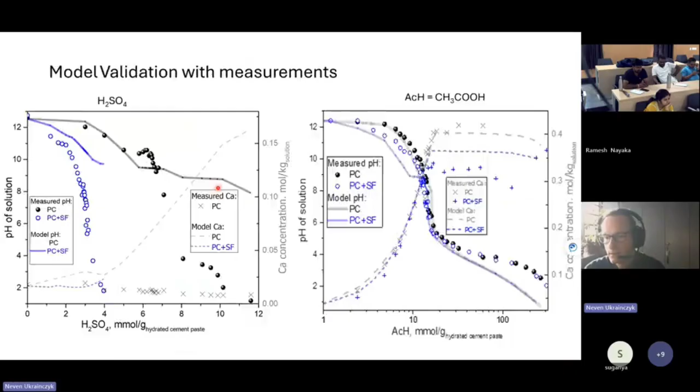But in EDS, in normal SEM, there is not enough energy, or you need a very long measurement time, which is not possible because the image drifts. So either you need a very advanced technique, a very high energy field emission gun, and then per pixel you can really get chemical composition. But this is a rare technique, not many labs have this. What we have in our lab is just normal EDS, which we're also very happy with.

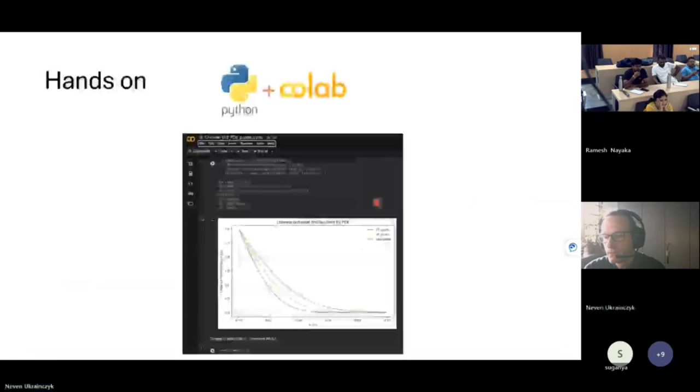But you cannot really do chemical composition per pixel because the signal is very low, and that's why we need to take many pixels to get a good signal that we can fit. But then we have to do it in the software, so actually we have to do it manually, unfortunately, to get this kind of nice profiles.

So we have to do it inside the EDX software. Any other questions?

One more question here. When we talk about activating supplementary cementitious materials, either we can do it with a geopolymer technique or we can go for the alkali activation technique. In geopolymer, usually the molarity is the main concept to keep the dosage, but in alkali activation, the concentration of Na2O would play the major role. So as far as advantage is considered, which one do you prefer? Which one is more advantageous to manufacture—alkali activated concrete or geopolymer concrete?

That depends on the application. Davidovits is like the father of geopolymers. I would recommend the book from Davidovits if you don't have it—he has a very strong definition of geopolymers. On the other side, you have John Provis, who is more into alkali activated materials. Actually, Davidovits doesn't agree with the term alkali activated materials. He doesn't like it, and he has some chemical arguments for why you cannot call it that, which I understand. He's actually right also.

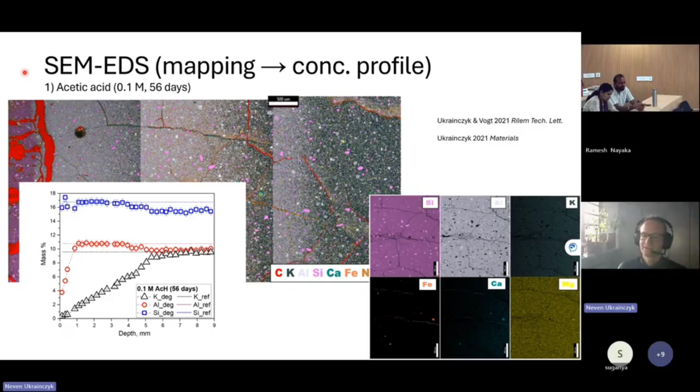There's a geopolymer camp organized every year in France by Davidovits. Now his son Ralph Davidovits is taking over—you can see it on LinkedIn. He is leading this research in geopolymers, and they really do great stuff. Of course, they are the founders, and now the son is taking over. I was at this geopolymer camp two or three years ago, and it's really nice—you really understand the subject. I would recommend you go there if you get the chance. It's a very nice environment, really like a camp, but you learn a lot.